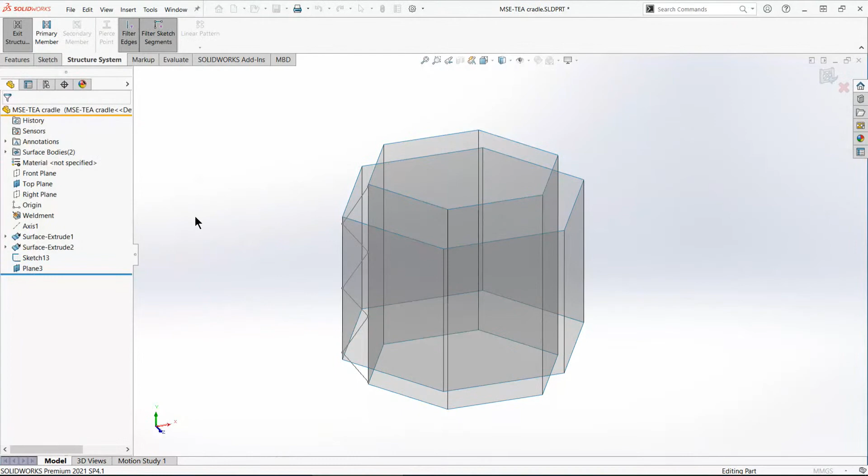The way it works is that structure system itself is like a design environment. You get in and start doing something, similar to when you're sketching and in the sketching environment. With structure system, you get into the environment, and then you're going to see primary members and secondary members.

Primary members are something you add with existing geometry, like sketches, but also edges. Secondary members you can use without any geometry existing, which is kind of neat.

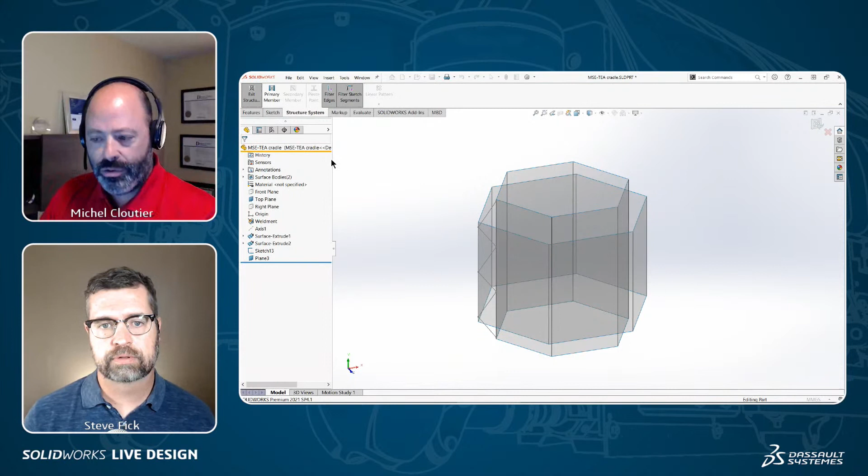In this example, I don't have to have any sketches or anything like that for secondary members, you can just basically apply them. But you got to have something to start for primary members, and that's what we're going to do now. So I'm in the structure system environment, I go to primary members.

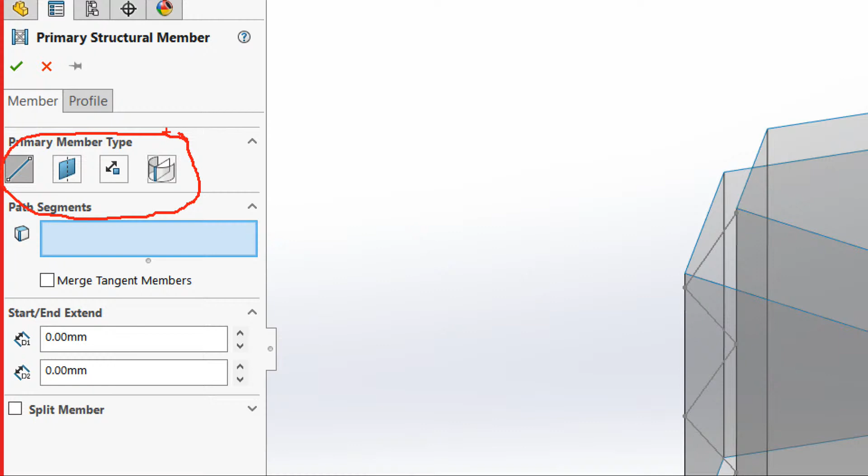The other big difference with traditional weldments is that we can use a lot more types of entities to create, assign, or put the beams in place. In traditional weldments, it's always a sketch. You always need a sketch to do anything.

Here, what I can do is filter my model edges and just window select everything. Now, those are not sketches, those are edges. Just think of how much work that would have needed if you had to sketch everything. So I've got 36 edges selected.

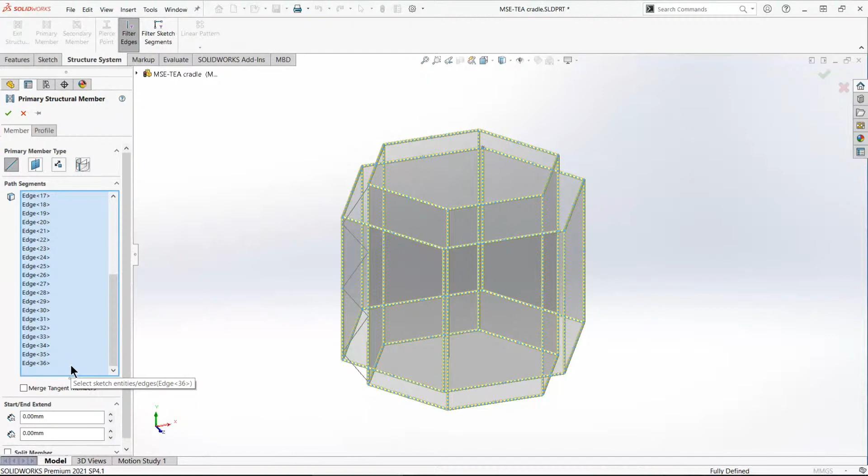Yeah, that's a really great point, because my background's machine design too, and 3D sketches have always been really powerful, but if I'm honest, they get a little unwieldy sometimes when you get into this. That's one of the things, because you've got so much sketching to do that sometimes the sketch relations are kind of hard to manage at some point.

Here, I just got a model. So if you want to make a frame that looks like a box, you just model a cube, pick all the edges, and basically you're done. It's a great way to do things very quickly.

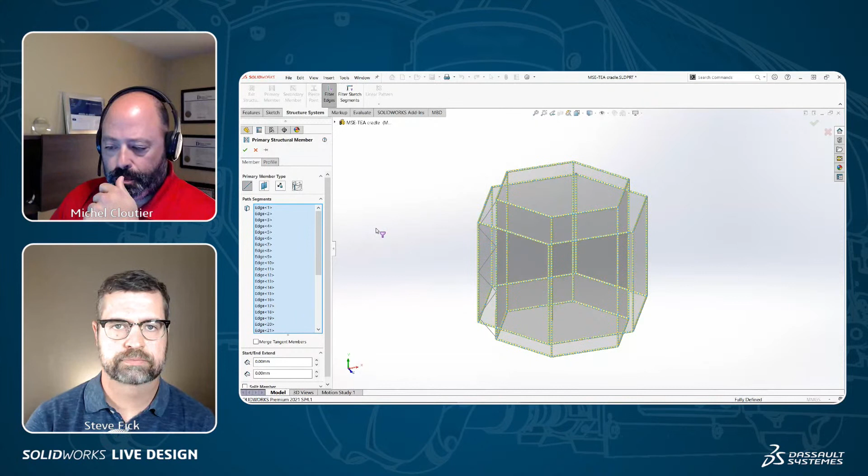Now, very similar to weldments, you're going to be able to go in and select the different profiles you want to use. We're basically using the same pull down menus as you would with traditional weldments. Here I want to use square tubes, 10 by 10, and the preview updates, everything looks good.

One note about the profiles, however. If you've been a long time SOLIDWORKS user, when we initially started Weldments, there were two types of standards for profiles: file-based and configuration-based profile. Going back all the way to 2006, when we first introduced Weldments, we had one file for every type of profile and for every dimension of profile.

Over the years, we introduced configuration-based profile, where you could use one profile, but in that profile library, all the sizes were configurations. For weldments, for structure systems, you have to use the latter one, the configuration-based. If you're still using the traditional file-based, you'll have to migrate, but I think you'll see the advantages of doing so real quick.

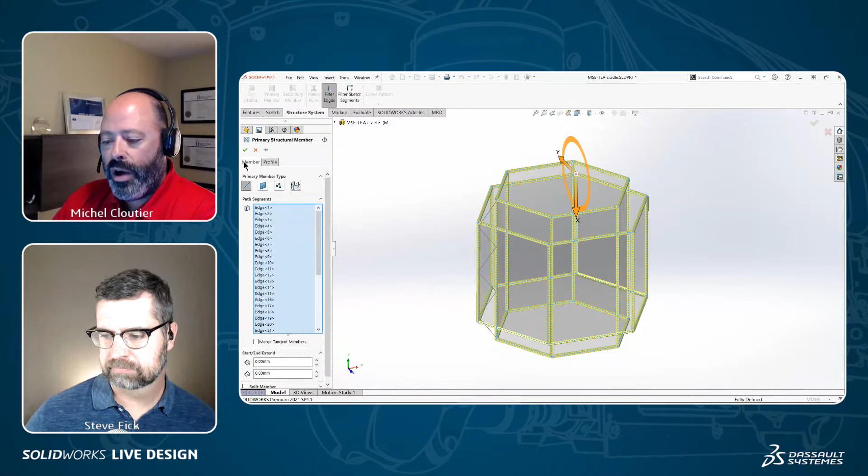Cool. So I've put all those beams, all those members, 36 of them, real quick. I'm simply going to keep this visible and click OK, and that's going to bring me to another thing that is really interesting about structure system.

Again, relating back to traditional weldments, if you're using traditional weldments, you can create groups to help organize the different weldments and help with how to trim them. But if you want to use a different size or even a different shape of member, it has to go in a different feature.

You cannot do everything in one feature. Okay, that's on traditional weldments.

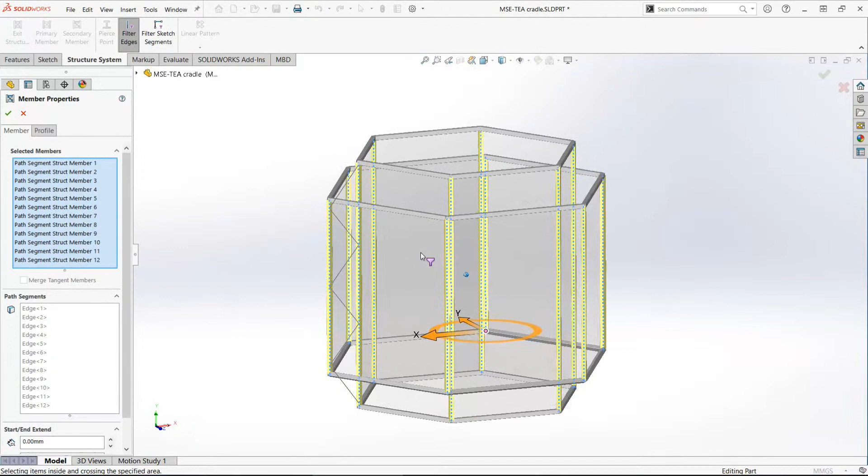Right. In the structure system, let's just say I want to have all those vertical beams to be something different than the square tubing. I can just reselect them. I'm still in the structure system environment, still in the structure system feature if you want, but I can go in and reselect what the beams I've already applied, and go back into the profile and say, you know what, those I'd really want to have those to be round, and I want those to be 10 inches in diameter, and it does what it does. So now I've got two different types of profile still within the same feature. Okay, gotcha. Right? Yep.

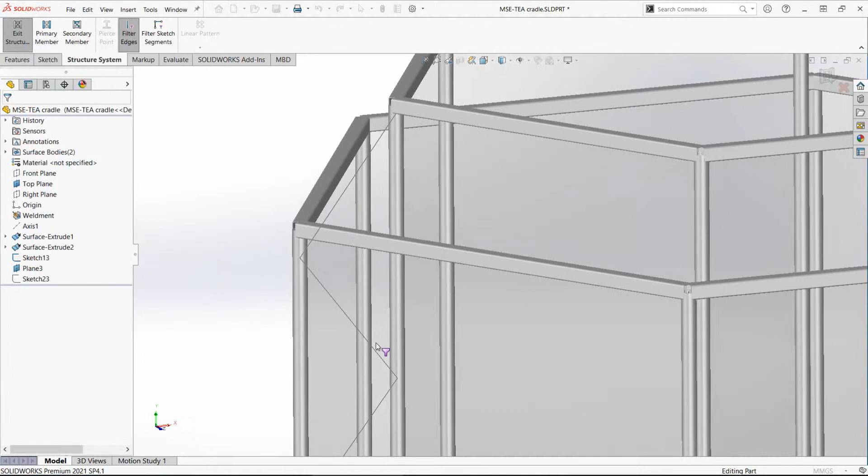Now let's go on. So you kind of see where I got this sketch. This is a traditional sketch that kind of zigzags, and you can assume that's, I want to connect these two together. So that's what I'm going to do. I'm simply going to say, well, I want to have a member coming down here.

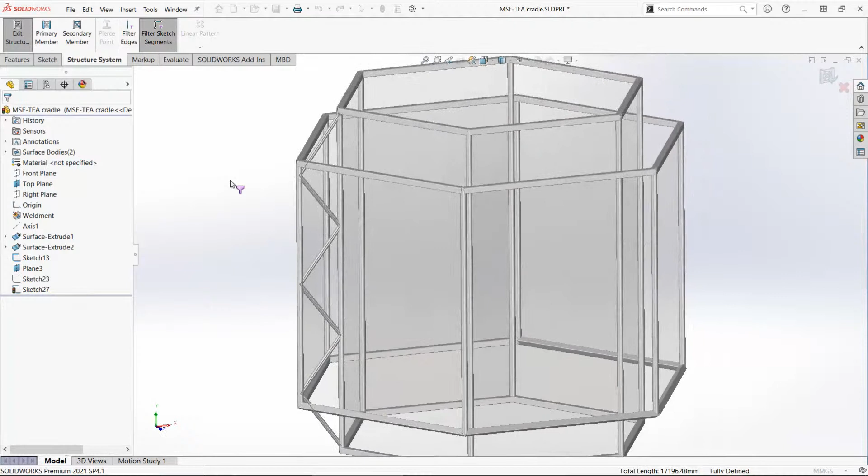So that would be kind of similar like a traditional weldment where I have a sketch to define it. But again, within the same weldment structure feature, I'm going to say I want this to be a different size, I want this to be smaller. So again, within the same feature, I now have two different shapes, three different sizes, which is pretty awesome. I'm still doing everything in the same feature, which is really cool.

Very cool. So at this stage, and all of those I've been doing so far, I was using the primary member, right? Because I had some geometry to latch on. I had my model edges in the first case, I had the sketch in the second case, right?

Right. Now, I want to also have, you see like the hexagon ring, I want to have another ring that kind of sits a little lower over here in the inside cage, but I don't have any geometry to support that. That's where the secondary member comes in.

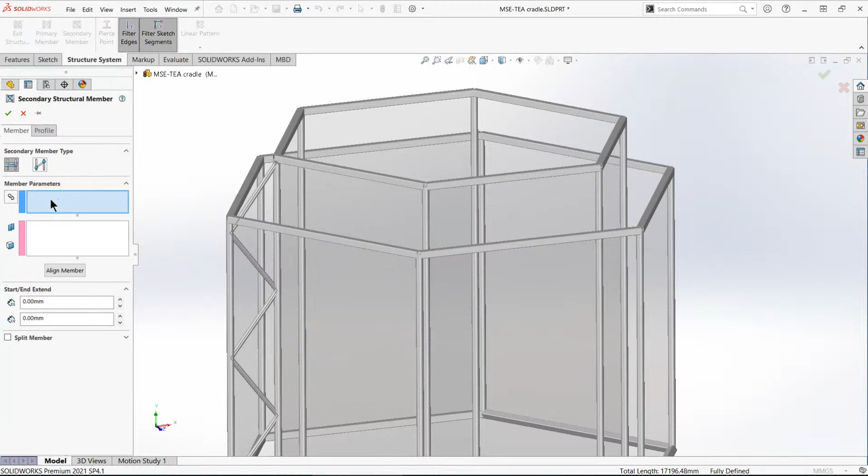And what I do here is that I'm going to say, well, you know what, I want to connect this beam, and there's a little chain option. I'm going to turn that on. So I want to connect this beam, this beam, this beam, this one, this one, this one, and that one. So you see they're all selected in the parameters here.

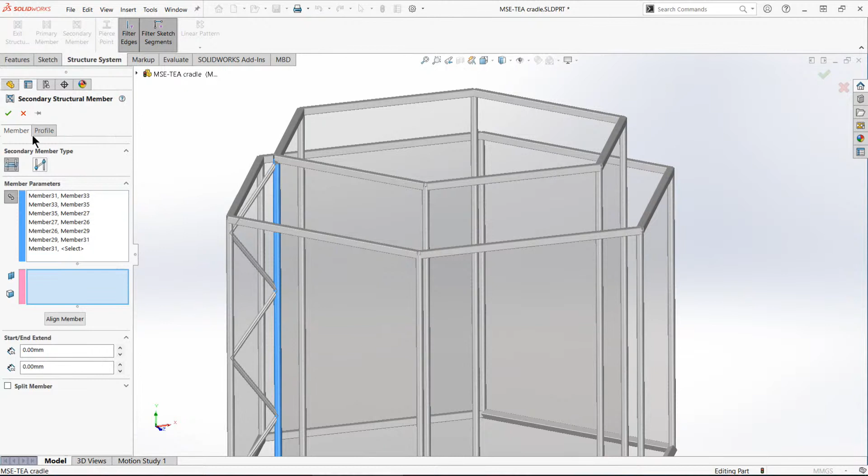And then I'm going to say, okay, so where do I want that new shape to land? So for that, I'm simply going to use a reference plane. And there's one. Gotcha. So actually, this is a plane that you had predefined, prior to going through this, but easy enough to create. Got it. Yeah, exactly. And you could even use the original, like the top plane, front plane if you want.

But you see here, I don't have any existing geometry other than the reference plane, right? There's no sketches, there's no model edges. And that's where secondary members becomes really handy. You don't have to kind of have geometry, you can just say, okay, I'm going to just put beams where I need them.

Gotcha. So Michel, let me ask you a question real quick. Do you find yourself, I see you using the filter edges, filter sketch segments. Are those pretty valuable when you're doing these types of structures?

Yeah, I mean, if you've taken the habit of, for complex structures, it's oftentimes really, it's easier to just create a model just so you have the edges and then populate the edges with the beam, and just use it as a kind of a building block to get the shape, like this one. Gotcha. Yeah. So if that's the case, I mean, you could always just pick manually if there's a few. In this case, I knew I was going to have to pick a lot, so I just had the sketch filters and the edge filters in my toolbar. Gotcha.

So I think we've got a good deal done already. But one thing you'll notice is that I haven't talked about how to trim the corners just yet. Right, I was wondering about that. That's going to be a big part of doing this, right? Because I'm kind of just putting the beams where I want them, but there's no trimming that's been done yet.

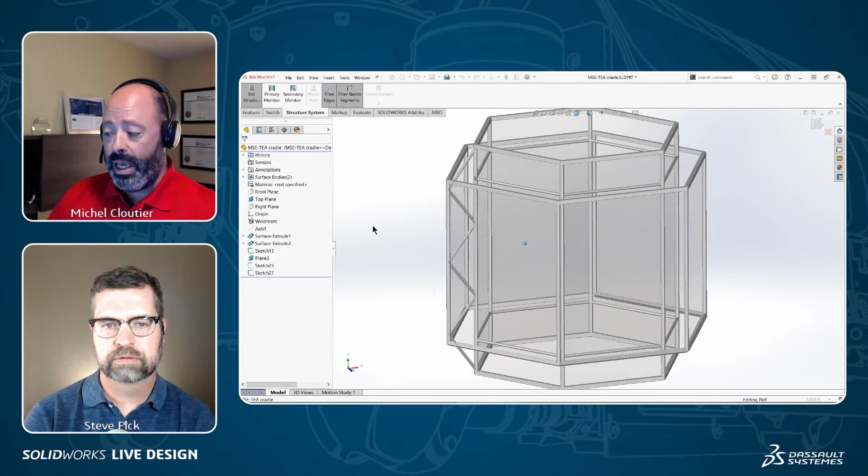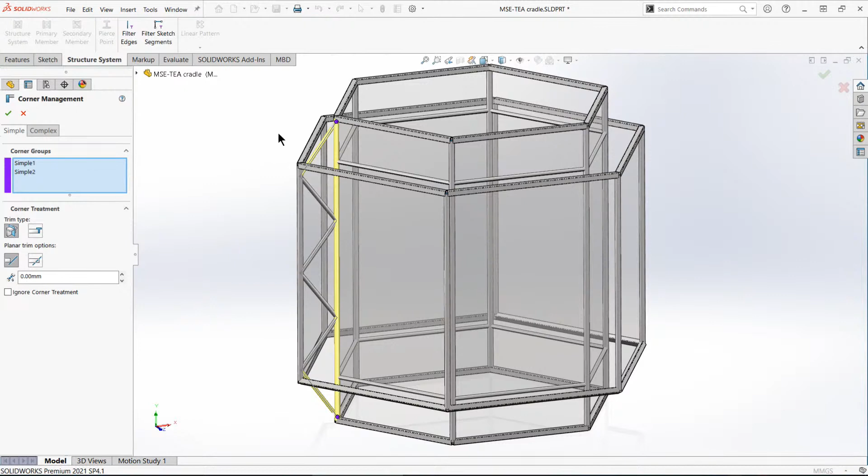When you use the structure system, you place the beams, and when you exit the structure system environment, that's when you're going to be prompted to take care of the corners and how you want to handle them. I'm still in structure system, that's why I haven't seen anything regarding the corner management tool yet. When I exit, you can click the structure system like a radio button, a push button, or exit like you would exit a sketch. Then you've got this tool here called corner management.

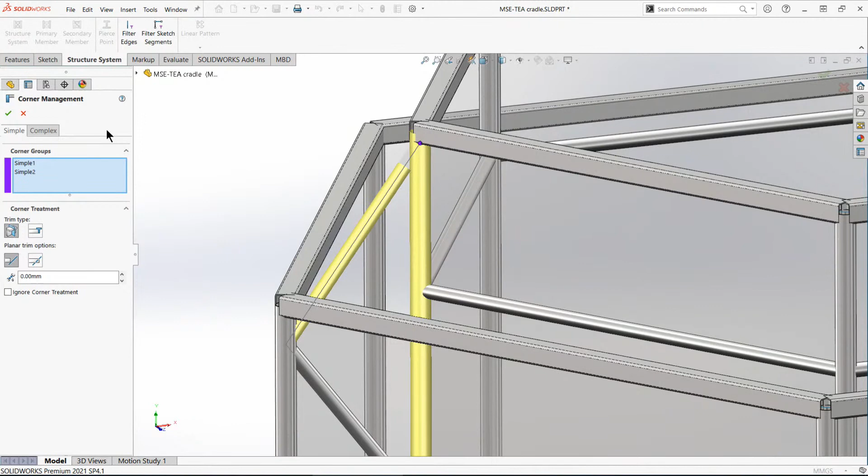Now when you look at this, there's actually two types shown: simple and complex. In reality, there might be up to four different types of corners, depending on how they meet together. A simple corner is when two beams meet but only one needs to be trimmed. Then you could have a dual corner where two beams meet and both need to be trimmed, and a complex corner when three or more beams meet and three or more of them need to be trimmed.

So if you look at this, here's a good example. I've got two simple corners, you see one here. I can simply go to the option and that's going to default everything to the same thing, or I could click the little button here to isolate this corner. In this case, this corner, the other one below, I don't want to have a planar trim, I want a body trim. So I simply click body trim, and then we're done. That takes care of the simple corners.

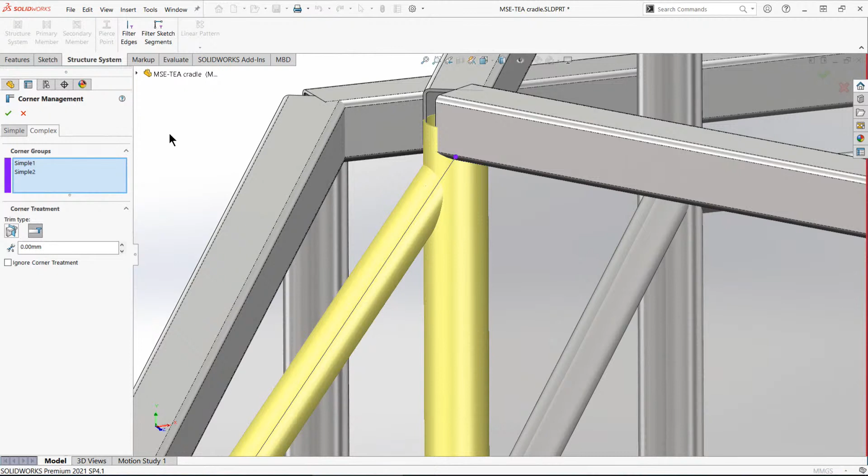Now if I go to the other tab, that's where I'm going to have more work to do because there's a lot of complex corners. Depending on the final shape you want, that's when you decide how to order the trim. There's a lot of them, so I'm going to do just one to highlight. If you select the little point, it isolates this one, which is the third one, and then you've got all those options. Again, if you navigate, you can see which member is which, and which one you want to trim, which one to have a miter, and which one you just want to have a planar trim.

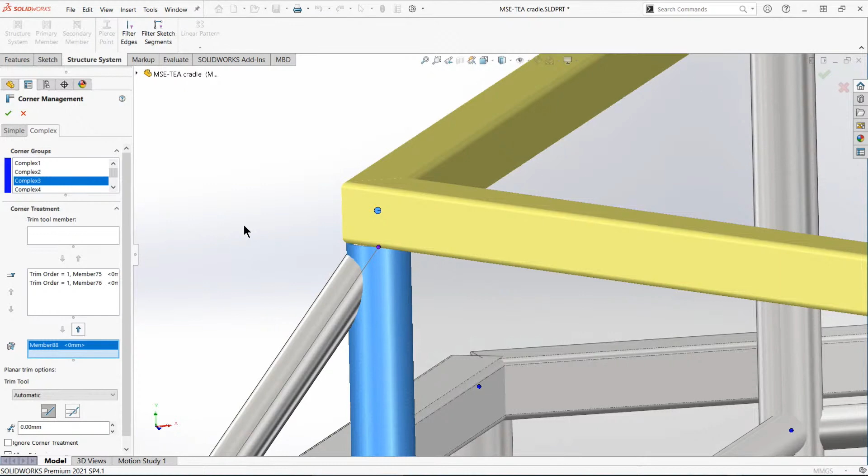So if I select, in this case really what I want is for both square tubes to be mitered, and then for the cylindrical tube to just cut flush underneath it. That would be the easiest way to manufacture this. So I'm going to select this body, which is the vertical beam we see in blue, and I'm simply going to move it down to this box that says planar trim. You see really quickly, now this one here is taken care of.

So in this example, you would probably just go along and cherry pick all your beams and make sure you've got everything selected. Then when you click OK and exit out of the structure system with the corner management tool, everything's done and set. The corner is done, the trimming's done everywhere, and you're basically ready to go for the next step.

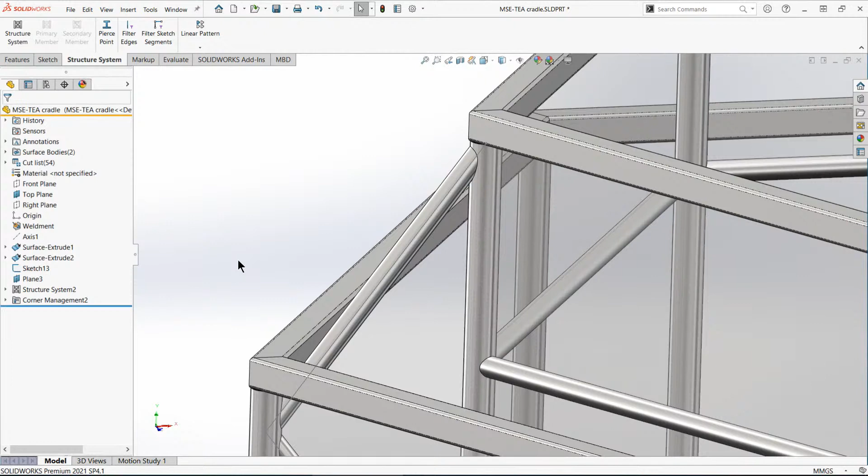Now, I'm going to interrupt real quick just to recap, because I think this is a really important set of steps. Making sure users understand that you can click on each of those colored dots. Sometimes we forget that when they're colored, you can do things with them, and then basically adjust the order until you get what you want in the preview to get the trim right. Yep, exactly. So for simple corners, oftentimes you can just default all of them to the same thing. For complex corners, it's probably better to have a look around to make sure it trims correctly.

Now, if you do any mistake on that, you'll notice what's populating in the tree. Let me expand that a little bit. Everything is still two features: one feature for the structure system, another for the corner management. So if you mispicked, or if there's one corner you don't like, you can still go in and edit those features and fix it. It's not a 'you're done' kind of thing—you can go in and take care of fixing some of those if you need to.

Michel, we've had a couple really good questions come in. One asked whether we still get the same cut list capabilities out of this. The second was, from a general modeling strategy standpoint, is this something that could also be used for smaller weldment designs, or is it really geared toward larger structures?

We call it structure system, and that might lead to confusion—there's no size reference involved, it's more about the complexity of the weldment itself than the size. In many cases size is going to be a factor in determining whether you do traditional weldments or structure system, but size alone is not the guiding factor for which one you should use.

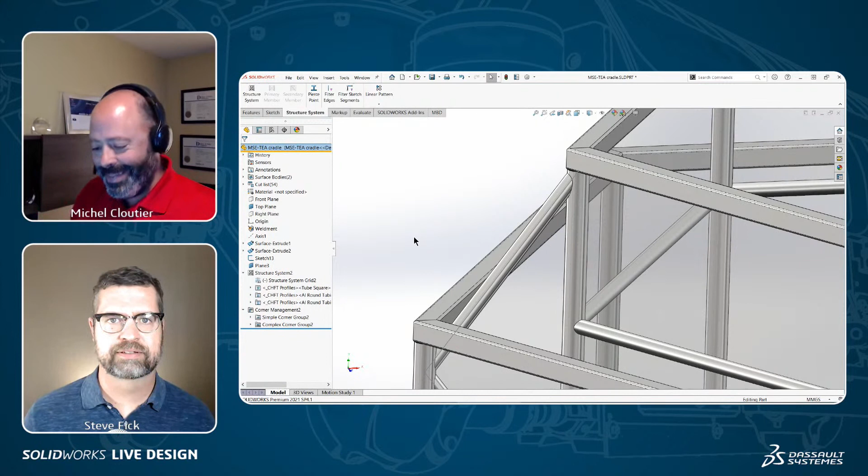Okay, that makes sense. And that cut list question, I want to tackle that—I have it on this, it's two minutes. No, perfect, I just wanted to make sure we got to it.

Let me swap. I did the corners here for one part, but I want to go to my almost finished model where all the corners are already trimmed, just to expose some more functionality—like patterning. It's not because it's a structure system model that you can't use patterns; you can still use traditional patterns. Here I'm going to pattern the bodies for these cross braces. I have an axis, select and pick, and choose how many—six of them. Click OK.

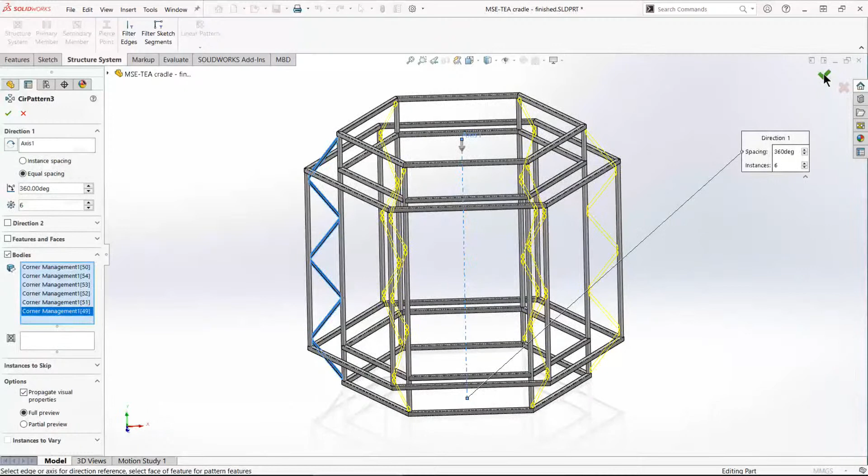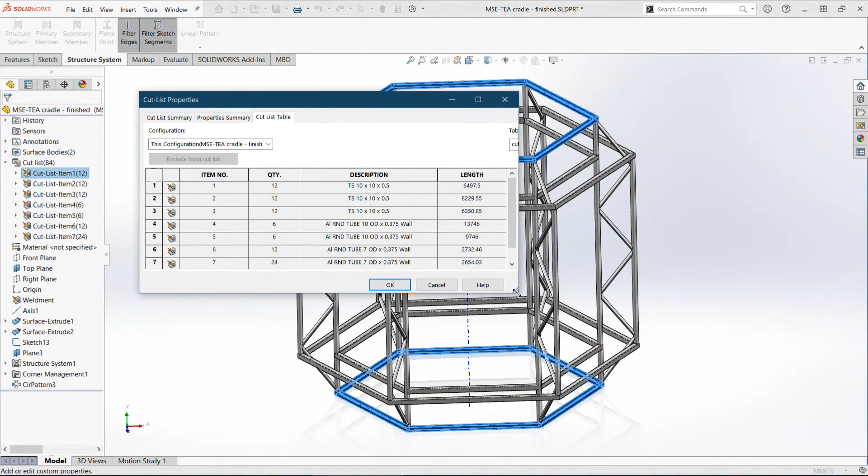To the question about cut list, which is a really great question, in essence it reacts the same way as a traditional weldment. You do have a cut list, and the same options to update it. If I go into my properties and into my cut list table, everything's there. If you're used to weldments and cut lists, that's going to react the same way. You'll even notice in the feature tree it's the same weldment icon—the feature that determines this is in fact a weldment. Same icon, and the cut list reacts the same way.

If you've got your profiles set up, you already have the description in there, and that description follows through here. As you can see, it picks up the length, and it gathers everything by quantity—so pretty much the same.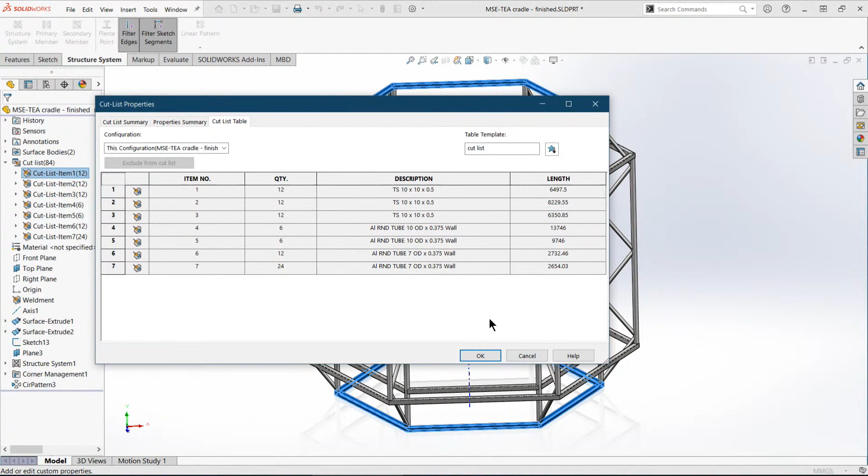For users who have been doing weldments but working in assemblies, and maybe weren't aware we could do this multi-body approach—where does the information, like the description, come from? Where does that get populated from as they're building this out?

That's going to come in from the profile library. Remember when I started my weldment, I selected a square tube of 10 inches—that's actually similar to a part file that has only the sketch profile information. But in that file, we also have the description, so that description gets populated here. That's where this is getting pulled from.

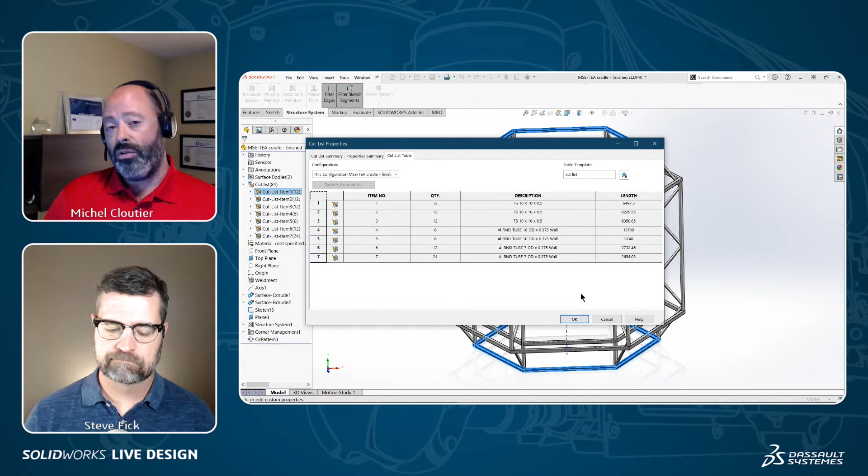So the profile file is where the description is contained? Yeah, that's what contains the description, for example. You could put other properties in if you wanted to, but in this case, that's where the description is coming from.

Understood, cool, perfect, good. So I did have another example, and I wanted to show that as well because I want to highlight some more functionality.

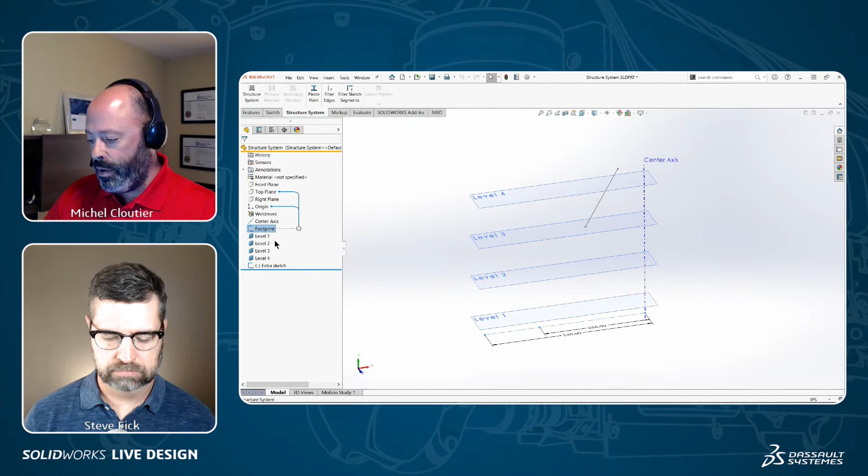Again, this is a fairly large structure. When we look at the footprint, this is in inches, so 540 inches. So fairly large, and it's going to be like a big circular pattern.

I'm gonna go again inside my structure system. I want to start, I don't have anything yet, so I kind of have to start by using primary members. And I'm going to just set my profiles up front so the preview looks better. And then I want to highlight some more options.

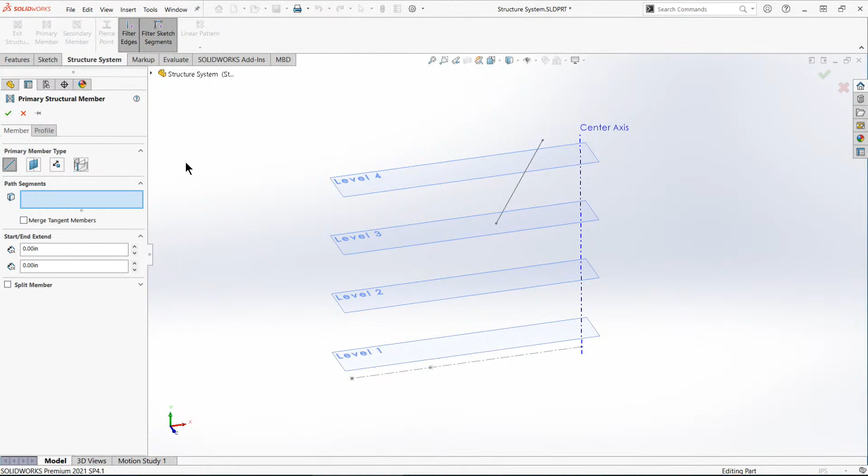So you saw me in the earlier example, I was using model edges. I use sketch as well. Now there's some pretty neat options here that I can expose.

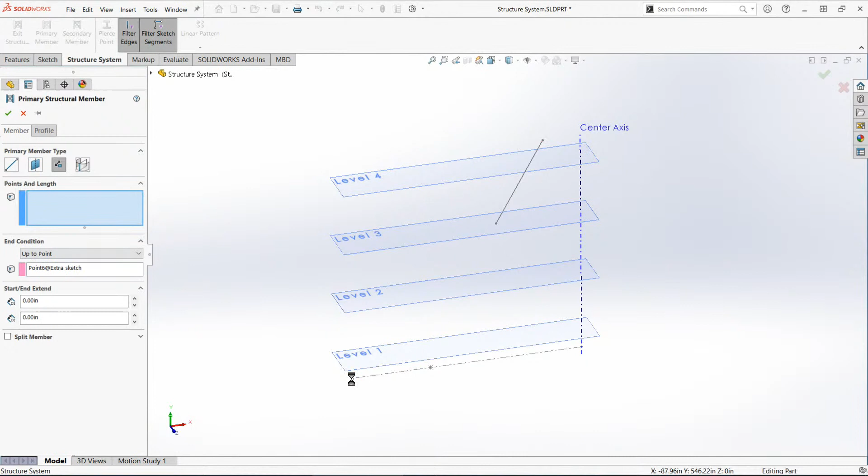For example, I like one called up to point, where you can say, well, you know what, this is going to be like the summit of my structure, and I want to have a beam starting from here, from here, from here. So very quickly, you can create these types of profile. That's awesome, because you have really minimal work to do to get there, right? You just have points in space.

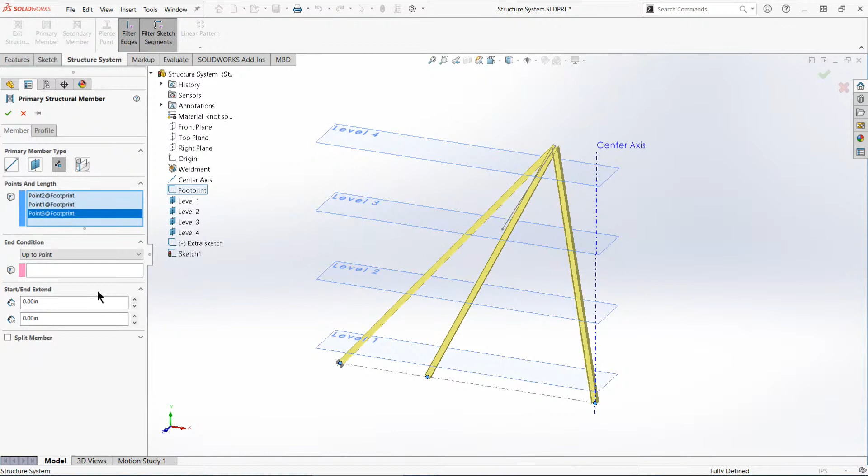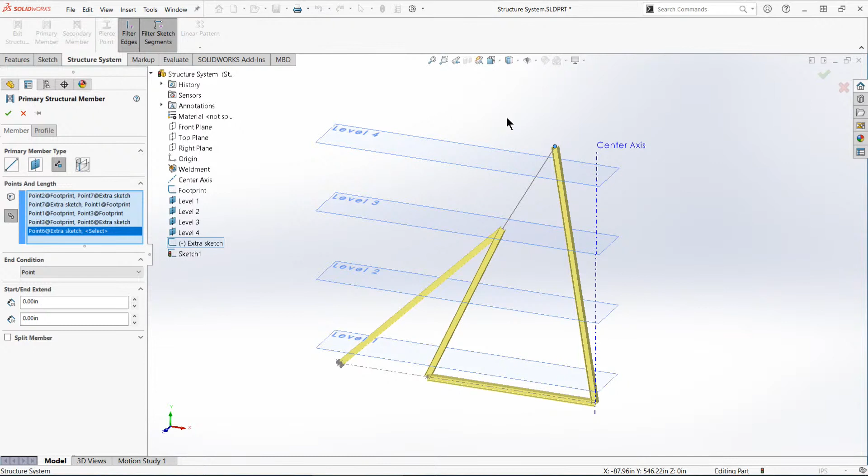Rather than doing that, maybe I want to say I want to have a point, and I can actually do a little bit like a daisy chain. So I can say, just go, follow the dots. You've done that in coloring books when you were a kid, right? Follow the dots. Try doing something like this with traditional weldments. It's harder, let's put it that way.

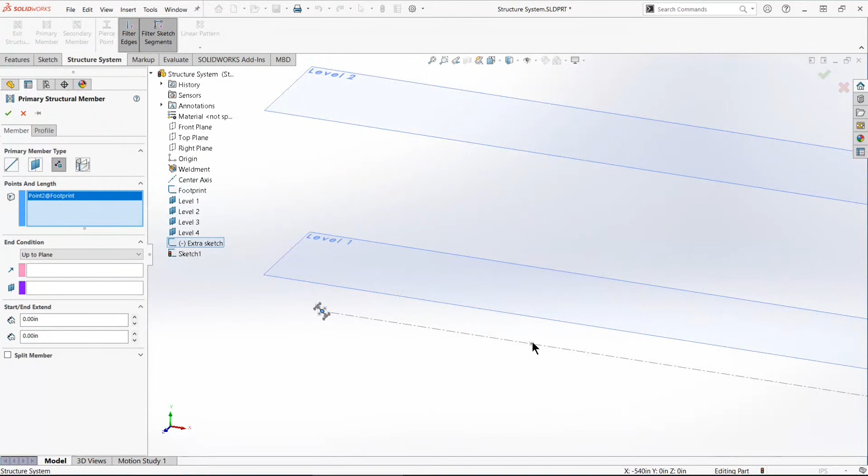But really what I want to do here, so let's get to work. I want to say, well, I want to have a beam that's going to start down here. So let's zoom into my endpoint. So I want to have a beam that starts from here, from these 2 points. And it's going where? Up to this level, right?

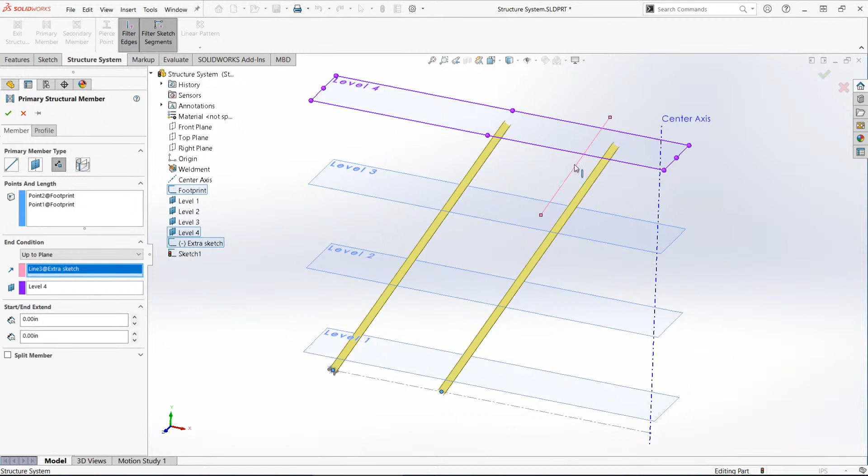So this is simply a reference plane. So I want to have 2 beams going up right up to this level. If I wanted to, I could even give it an orientation using an existing geometry, like you would do in a boss extrude, where you want the extrude to be a little sideways, so you can use a model edge or a sketch. So in this case, I'm going to simply throw in these 2 beams, right? And I'm going to say okay to that.

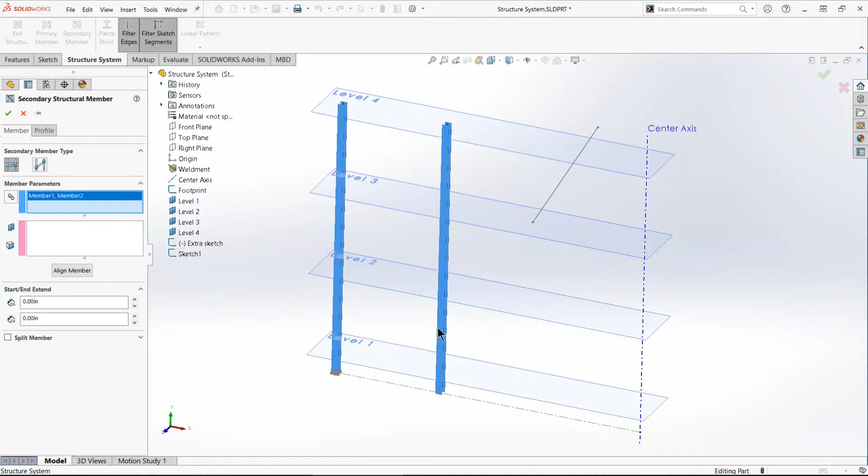And I'm simply going to jump directly into my secondary members, because now I want to connect these 2 beams together, like you see the reference planes, right? So I can pick the pair I want to connect. I want to connect these 2 pairs together. And I want to have a beam here, here, here, and here.

Nice, I can go in and change the profile. So I'll make that a little smaller. And then, if you've been using weldments, you're gonna see some options that you're used to with weldments, right? So let's say when you drop a profile, it always centers by default, right?

But sometimes you want that profile to be sitting on top of the sketch or the point or the edge, or below, or maybe in a corner. Well, you can do that. You simply just go ahead and select the pierce point.

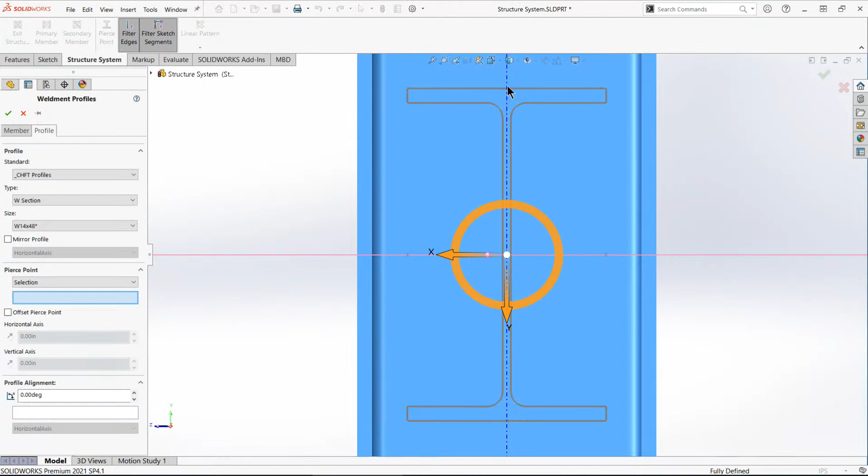So the model will reorient, so you see it from the end of the section. And very similar to traditional weldments, you have these points where you can select where the beam should actually pass through. So if I do that, you see the beam went underneath my reference plane, which is what I wanted. If I zoom back to my previous view, you see that the beam is now sitting at the same height.

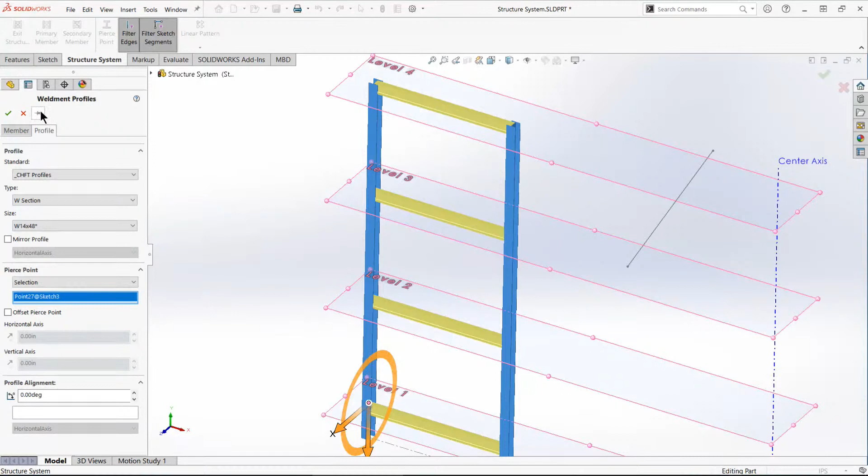This is what I wanted, so this is great. And I can, okay, I'll pin it because I want to add some more, but I'll simply pick okay to that. So I got these beams set up.

Now the next step is I want to connect a cross brace going from one corner to the other, right? The challenge is I'm going to have to cut because there's beams in between, right? I can't just put a beam in there. I have to kind of cut them out as I'm going down.

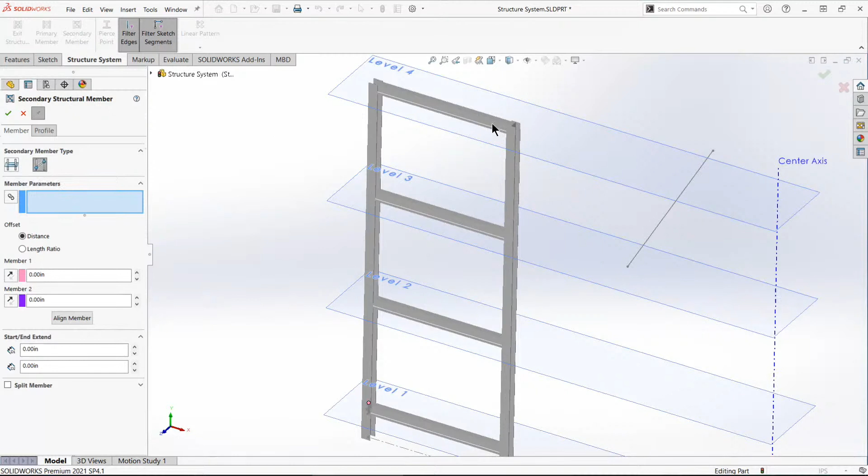So I'm going to use this option and say I want to connect a beam from this one to this one. And now you see I got dimensions, right? So these are the dimensions from the endpoint of the top beam and the dimension from the endpoint of the bottom beam. Does that make sense? Yep, all right.

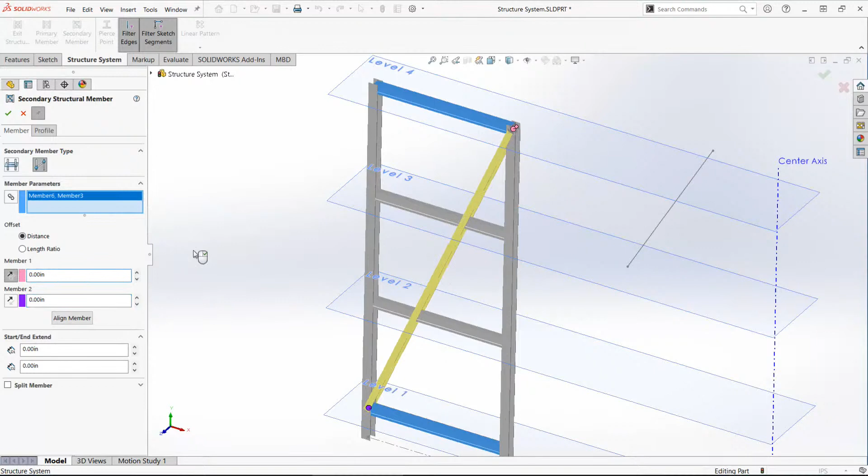So for example, this one, I want it to be zero from that end. I want it to be really corner to corner and zero to that end. So now it's positioned.

It's not oriented correctly, but again, very similar to traditional weldments. I can just go in and say, turn this 90 degrees. There you go. Nice.

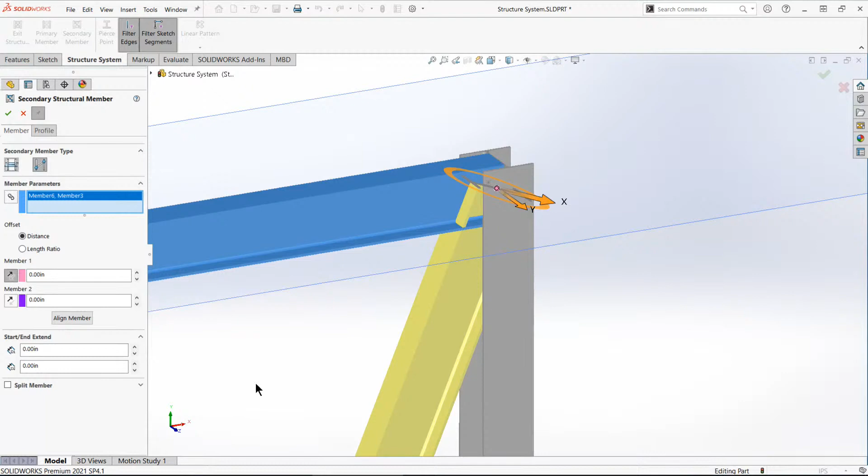Now the last option, this one is going to be really interesting and useful for this example. Like I said, I need to split these beams here. This won't work, so I do have in the command the split member, and I'm going to say where. I want to split here and I want to split there. And I'll click OK to that.

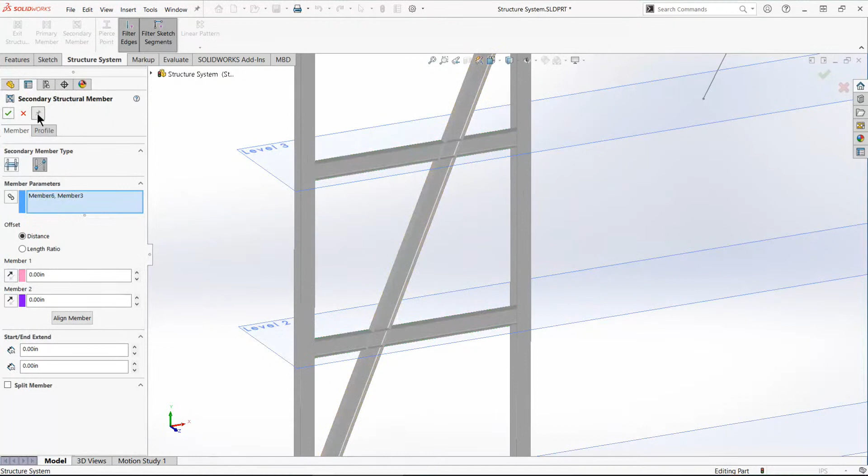And when I exit out, I'm going to be prompted for the corner management tool. So I can select my different options for the corner management tool.

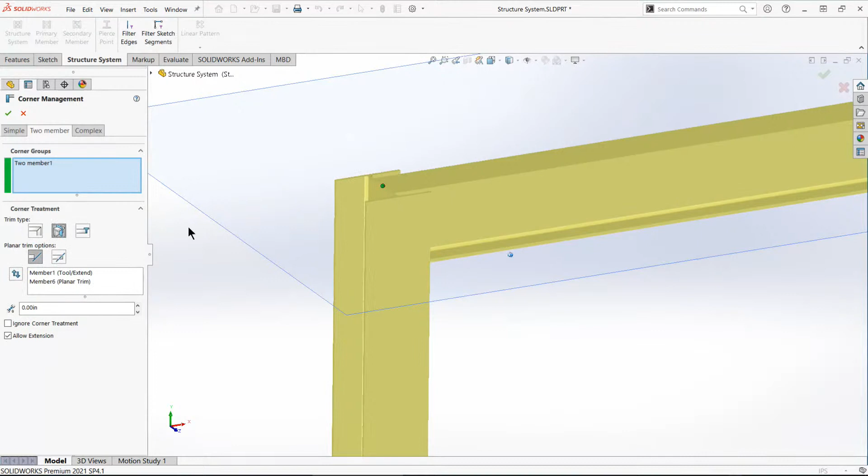And if I go over here, you see I don't want a miter here. I really want like a flat trim, or a planar trim I should say. I got then the corners here for the simple trim. Everything looks good, so I just use the default for the rest, and I click OK. And there you go.

That's amazing. I'm going to interrupt you again real quick. First off, thanks for everybody who submitted to the survey, Michelle. We had about 68% of the people on have not used the structure member. So this is great, hopefully people are.

Well, that's why we do this, right? To kind of expose some of those tools, a few tips and tricks. So we've had some great questions come in within the chat that I want to pose to you at this point.

One of them was about templates and custom properties, which I think we kind of talked about. But if you have maybe a standard part like a plate or something that has a standard hole pattern, can you insert it into the weldment and have it be part of the overall design?

I mean, nothing is preventing that. At the end of the day, that's a part, it's a SolidWorks part, so you can repurpose that in an assembly and do whatever you want. You can cut holes and do things with it. I will say, I don't want to spoil it, but there's some good stuff coming in 2022.

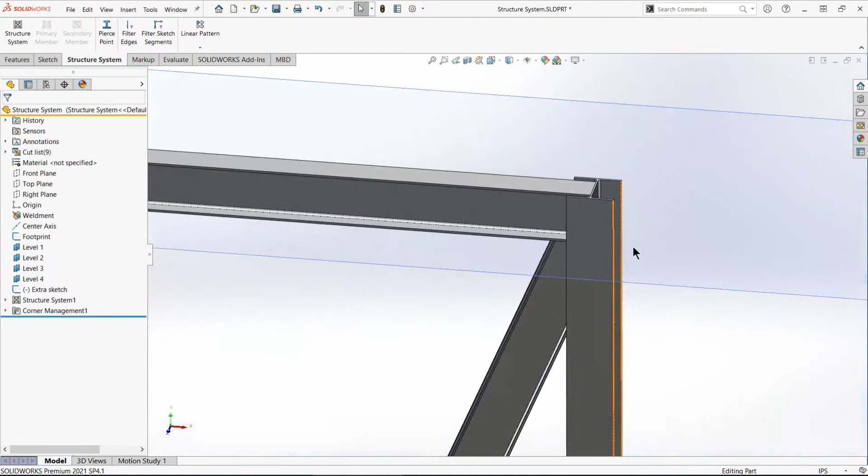The only thing I wanted to highlight, when you zoom in, let me just, if we hide this, you'll notice that everything is trimmed kind of neatly, exactly as I wanted. The other thing I wanted to highlight again is the beam here is trimmed as well.

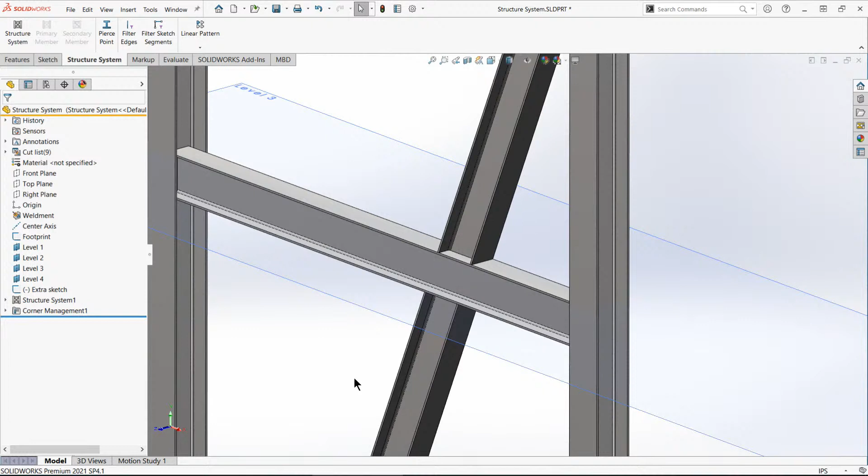So that was the split, actually occurred where the beam is exactly, and I don't have to do any rework on that, which is kind of cool.

Gotcha. So let's step back into this and complete this, because I want to pattern it, and then once the pattern's done, I want to reconnect what I've patterned to make the structure complete.

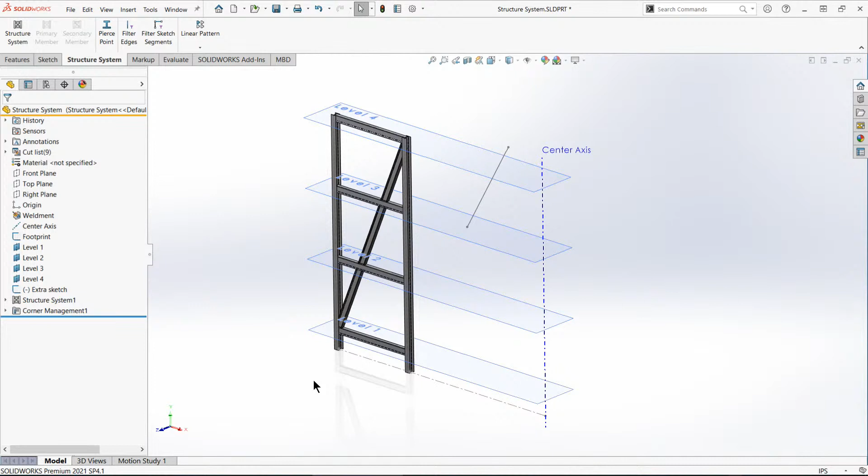So if I go ahead into my circular pattern, I'll use my center axis right here, and I'll do a pattern of 12. Now I want to pause here for one second.

When you look into bodies, in my first example, if you remember, I had that crisscross, and I picked the bodies one by one because it was one feature, and I only wanted the bodies of that crisscross section to be patterned, not the whole thing. Here, I do want the whole thing, right?

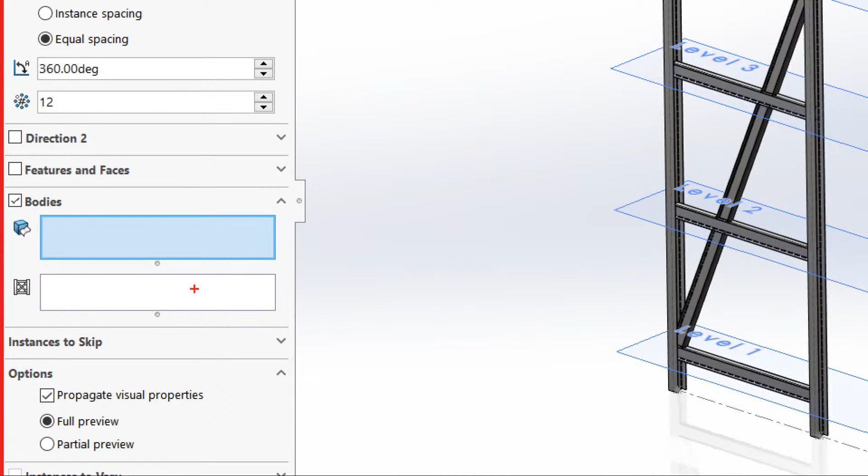So what I can do is, rather than selecting my bodies one at a time, I can select the whole structure system feature. Now that has multiple benefits. First, it's just easier to pick - you just do one pick rather than trying to select everything.

The other thing is, if you go back into your feature to change the original structure system feature, you don't need to go back in the pattern to update the body.

For example, let's say I go back to my original structure system feature and add new bodies, like new members in that feature. If I use the body pattern, I have to go back into the circular pattern and select those bodies that I've just added.

Yeah, because you've selected the bodies - in a lot of ways, the bodies are just individual items that exist, so you have to go back.

And on the opposite end, if I go back in my original structure system and I remove some of those, now I'm going to get an error if I use the body pattern, because now there's bodies missing.

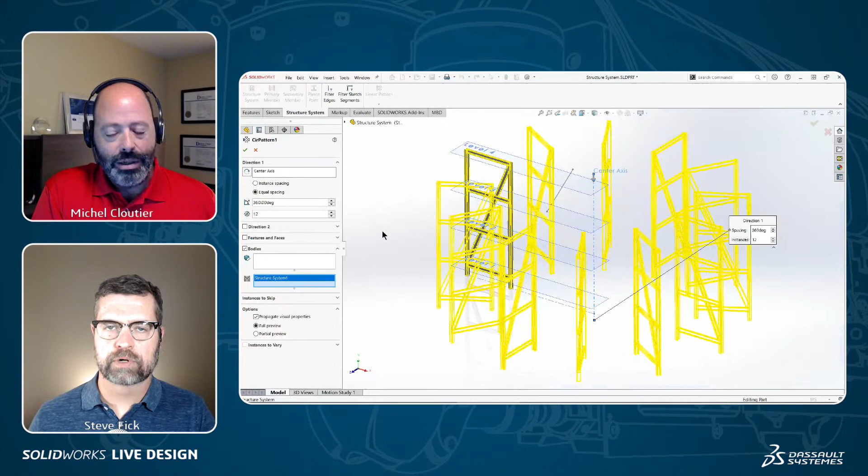So the structure system pattern really allows you to just do it and forget it. It's just a much easier way to do it when you can pattern the whole thing.

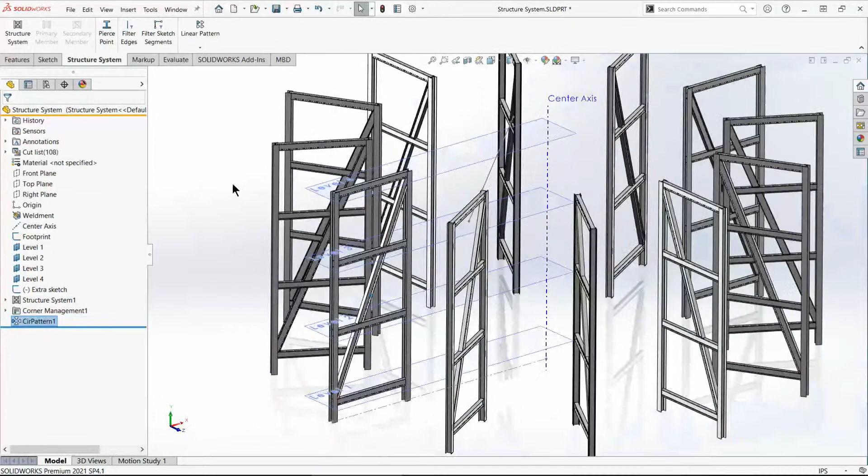Got it, cool. So I've got a pretty sizable structure so far, but I need to connect these frames, or these ladders, what it looks like, together with another structure system feature.

Now here's what's kind of interesting, and the point I wanted to get to - I'm going to go back into my structure system feature, but I have existing beams in here. I don't need to go to primary members again, I can jump directly to secondary members and say I want to connect these pairs together.

So the very first structure system feature you create, you're going to need a primary member or a set of primary members to start with. But then if you're connecting to something existing, you don't need to create those primary members anymore.

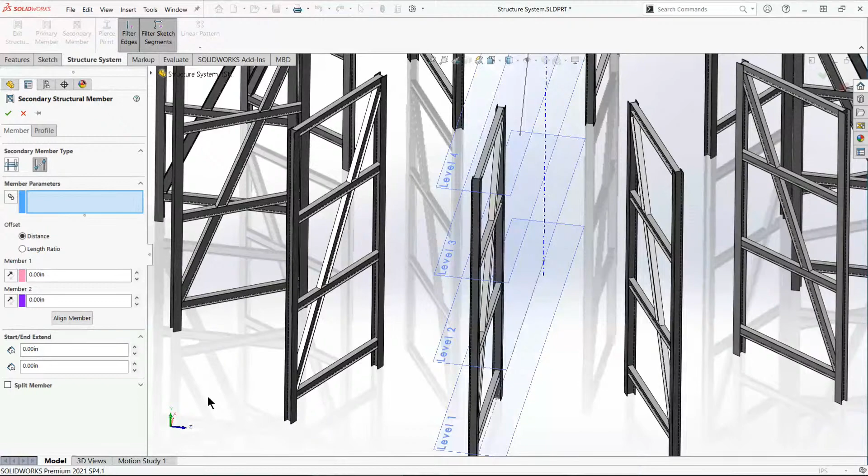You can just go and say, okay, I want to connect between those secondary members. So it's the first time you need primary members, but not the second time, not the third time, not the fourth time if you ever get there.

So here what I want to do is select the pairs I want to connect together. This is going to be one pair I'm connecting, this is going to be another pair. You see here, they actually show as pairs of members. Where do I want to have a beam?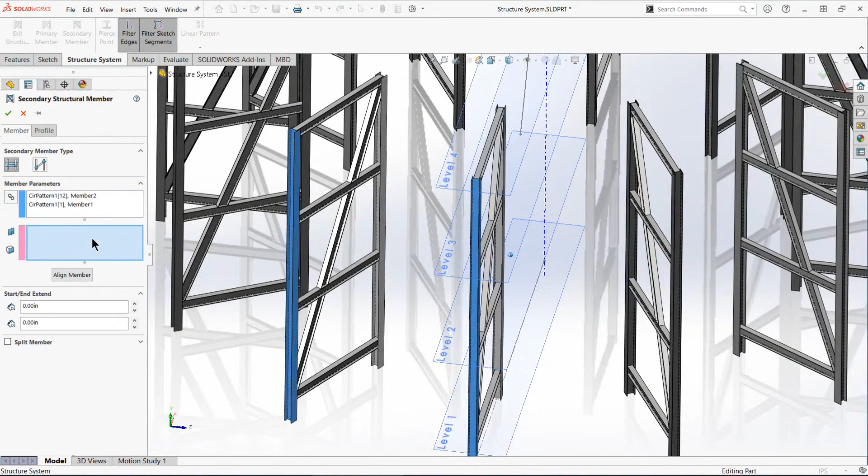Well, I'm going to select my reference planes, the same ones I used before, my levels. Now, as before, you're going to notice that they always land in the midpoint. Again, in this case, I don't want this to be centered - I want the beam to be underneath the plane, not in the middle of the plane.

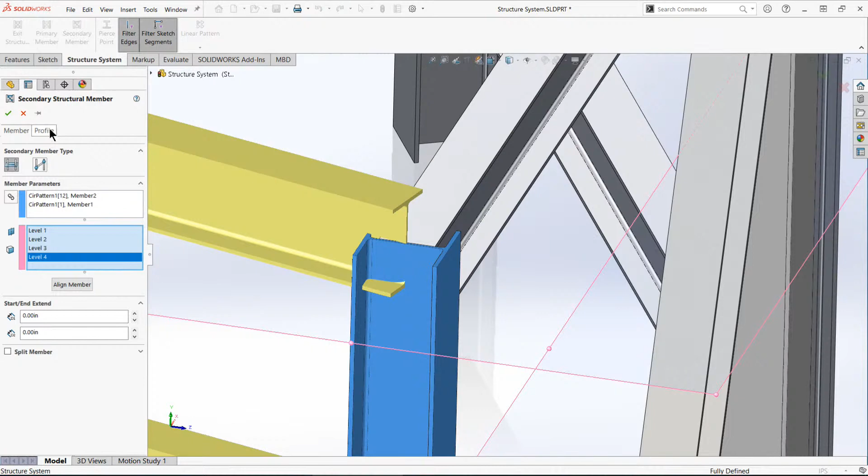So to fix that, I go in my profile, I just use my pierce point, and I want to say, well, you know what, you need to be tucked in here.

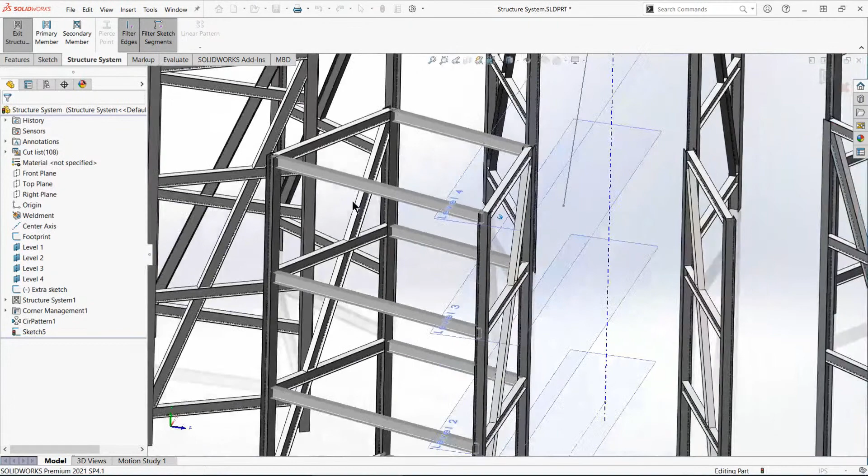And you click OK. If I zoom back, just to make sure everything looks good. Now, I'm still in the structure system feature, right? Yep, so you see the pairs going down.

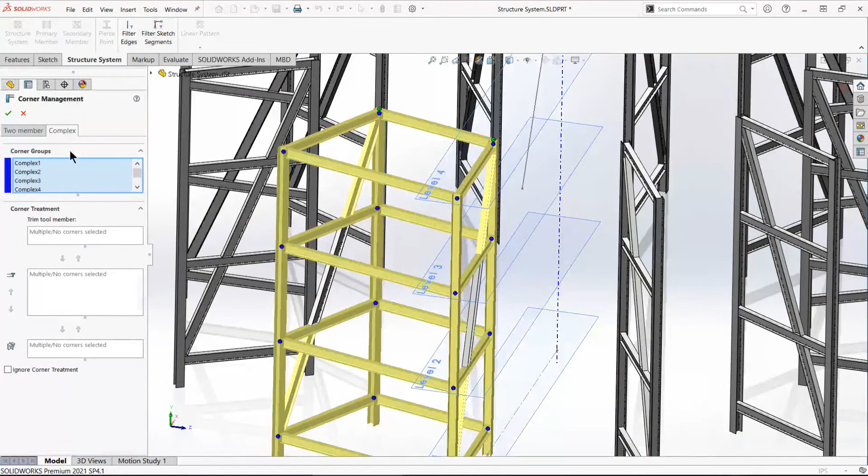So when I go to exit, I'm going to be prompted for the corner management tool, right? So that's my corner management tool, and however I want to deal with those corners is for me to decide. But I'll just use the default. Click OK.

Got it. Gosh, that makes me smile, because when I was doing machine design, sometimes we had to build the structures that our material handling equipment was going to sit on, and just the amount of frustration in kind of managing all these sketches and whatnot.

Whereas here, it's obviously very visual and tangible, because you can just click the member you want it to connect to and give it some guidance on where it needs to be. Yep, and you're good to go.

So man, this is very cool. I will say this, when it gets to a point where the complexity warrants it, it just makes so much sense to use structure system. It's just so much easier, faster. It's easier to manage because you don't have, like you said, the sketches.

Like I've seen weldments with very heavily, a lot of sketches, and if you have sketches that are too complex, you can break stuff. Yeah, fairly, you can end up with some errors, which you can alleviate a lot of using structure system, just using reference geometry.

So Michel, Jeff in the comments was just reminding me, one of the things we were going to look at in the feature is whether or not we could incorporate weld gap in the connections. I don't believe so, I'll have to follow up. Like I was using the corner management tool and was kind of looking for weld gap options. I don't believe it is. I'll follow up on that.

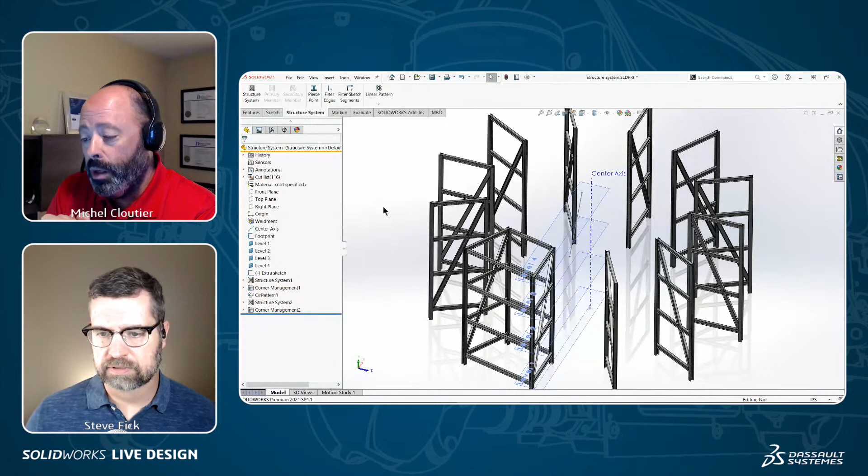Great, yeah, perfect. So if we just want to kind of wrap things up real quick, I don't know if there were any questions, but I'm wrapping up now so we can take time to answer those after. But the only thing I would do next to finish this is say, well, you know what, I want to do another circular pattern, but this time of the second structure system feature, right?

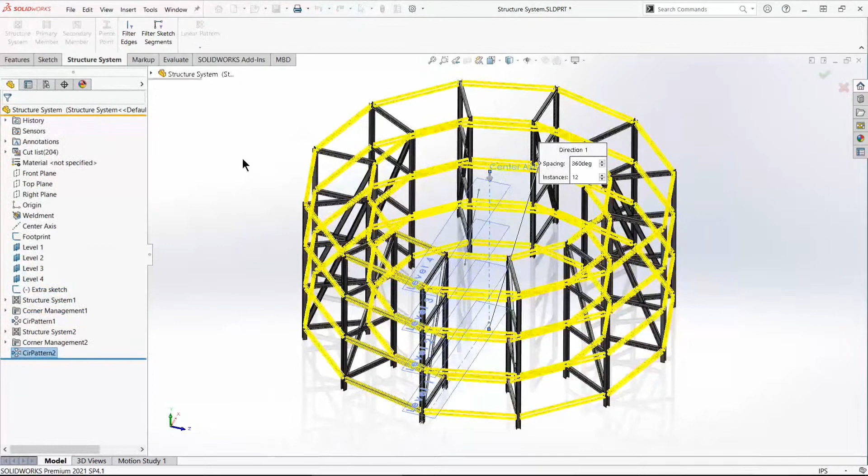Yeah, and when I do the pattern, the other nice thing about doing those patterns is it also pulls in the corner management, however I use the corner management tool to do it, right?

So just think of how you would have, I look at this example and I think, how would I have done that with regular weldments? And it would take some planning ahead.

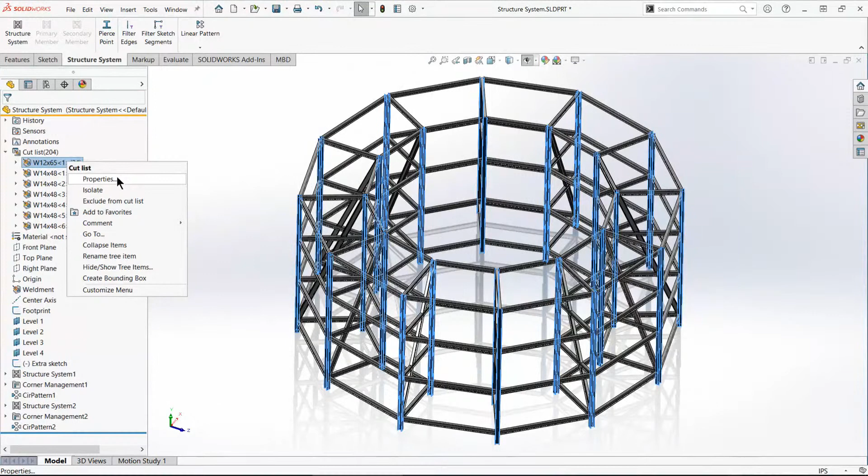And just to give you a sense of what we've accomplished, while we've been kind of chatting and discussing and answering questions and whatnot, I've put in 204 beam members in basically two structure system features and two patterns. That's how fast it was to create all of that.

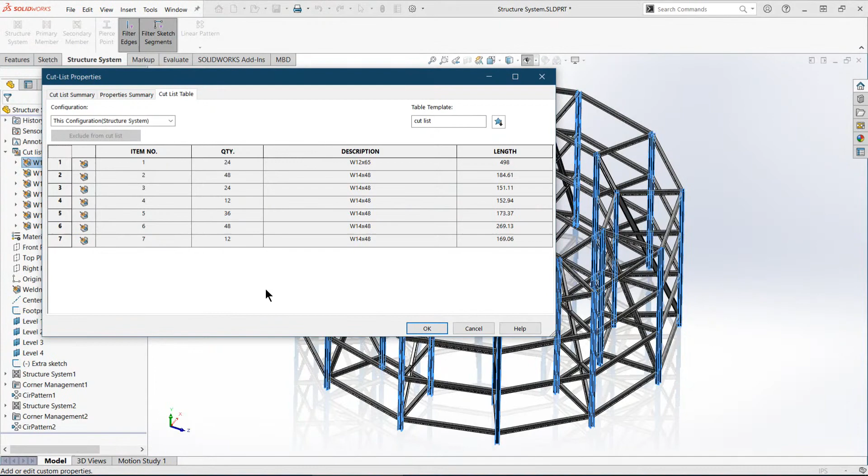And again, with a cut list that I can easily pull in, put it in a drawing, and off we go. So we've brought this cut list up a couple times. Again, maybe for users who are looking at weldments in general for the first time, is this cut list available to be put on a drawing if they want to detail out the structure?

Yep, so when you create your drawing, you put the model, the part, inside your drawing, and you insert table. It's going to be in the table option. There's a cut list option, and you just pull it in.

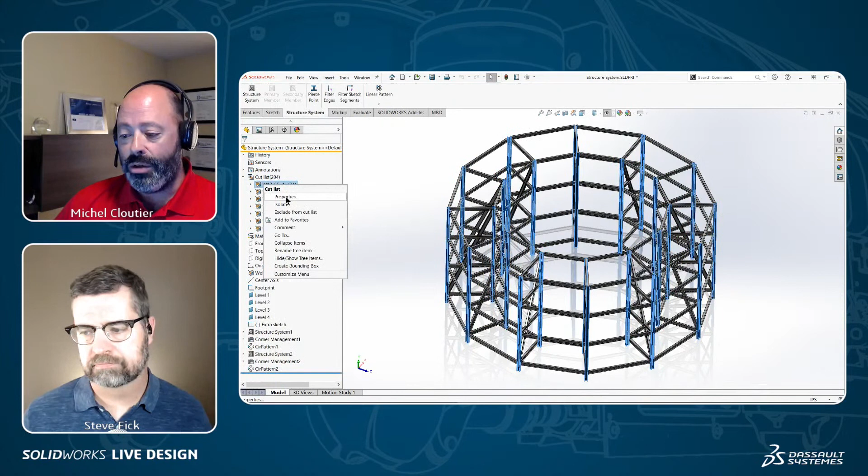This is what I like to do when I work in weldments, right? So you can go into that cut list, and you'll notice I've got the option to update automatically and create my cut list. I can expand, and I can actually go into each of the beams and see where they are. I can also start populating my cut list, right?

Okay, so these are the properties of all the different beams. You see, I can pull in length, angle, rotation. There's a lot of values I can pull into my cut list. Maybe I don't need all of that. But the last tab here, which is the cut list table, is actually how it's going to look when you put it on the drawing, right? Right, okay.

So if you feel like, sometimes you'll put in a gusset, a plate that you'll model manually and just add it, and there's not going to be any description. Before going into a drawing and noticing you've got something missing in your cut list, you can actually take care of that here.

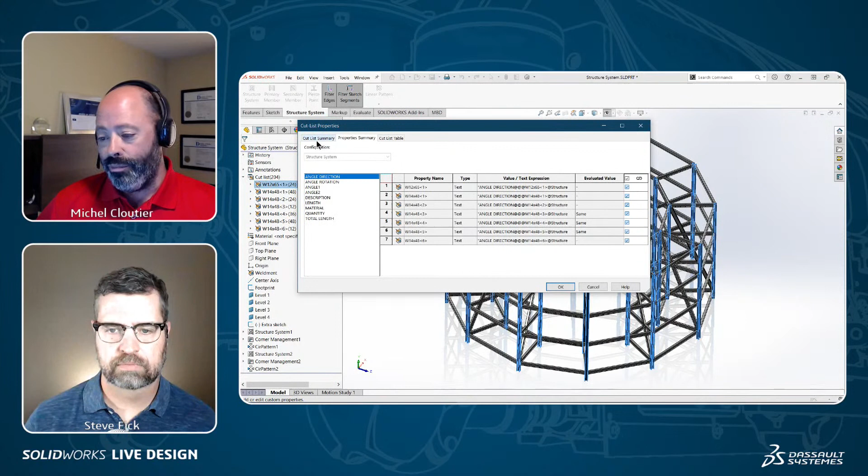So that tab here, the Cut List Table Tab, actually shows you exactly how the cut list is going to look on your drawing, so you can see if you want to make any changes. You can go into your properties and fill in the blanks. For example, my description, I want to use another description, I could change it in here, and that would reflect in my cut list.

Got it. Okay, so especially for people who do larger structures like this, I think your mind naturally leads to the question: what happens if I need to put holes, or I need to bolt these structures together? How does that play out?

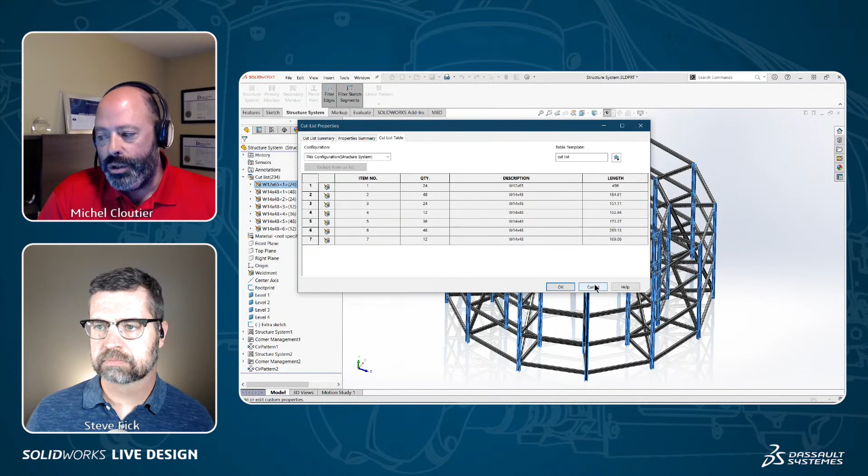So when we first introduced structure system in 2019, that was never a one-year project. It was planned for - we kind of knew where R&D was going and what we wanted it to do. So there's been enhancements since 2019, 2020, 2021.

And something that gets me really excited about 2022, we can talk about it now a little, is that in 2022 we're going to introduce connections in the structure system environment. Because even though some of those might be welded, when it gets to that big, a lot is bolted together, and you need those connections, you need those plates, so we're introducing that into 2022, which gets me really excited.

So it's basically like a drag and drop your type of connection. It takes care of the holes in it and propagates that to your beams.

Yeah, that's one of the highlights. I've been skimming through the what's new 2022, and that's a big one. I'm really excited for that one. I think it's an exciting one for sure.